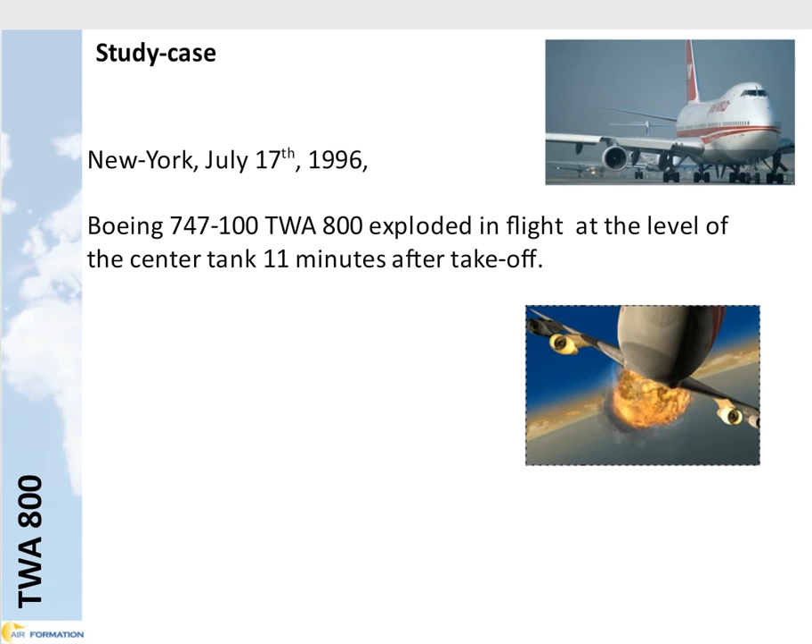The accident occurred on July 17th, 1996 in New York. A Boeing 747-100 from TWA, engaged in a scheduled New York-Paris flight, exploded 11 minutes after takeoff and crashed into the Atlantic Ocean. In this accident, 230 passengers were killed and there were no survivors.

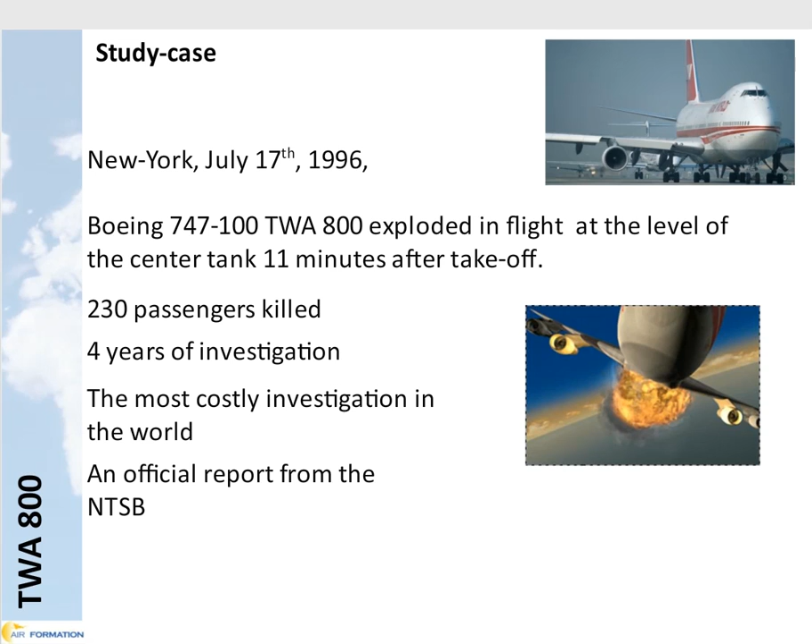The resulting investigation was directed by the NTSB, the American National Transportation Safety Board, and lasted 4 years. It is still considered to be the most costly investigation in the world, as investigators had to recover every single part of the aircraft so as to reassemble it and identify the reasons for its explosion.

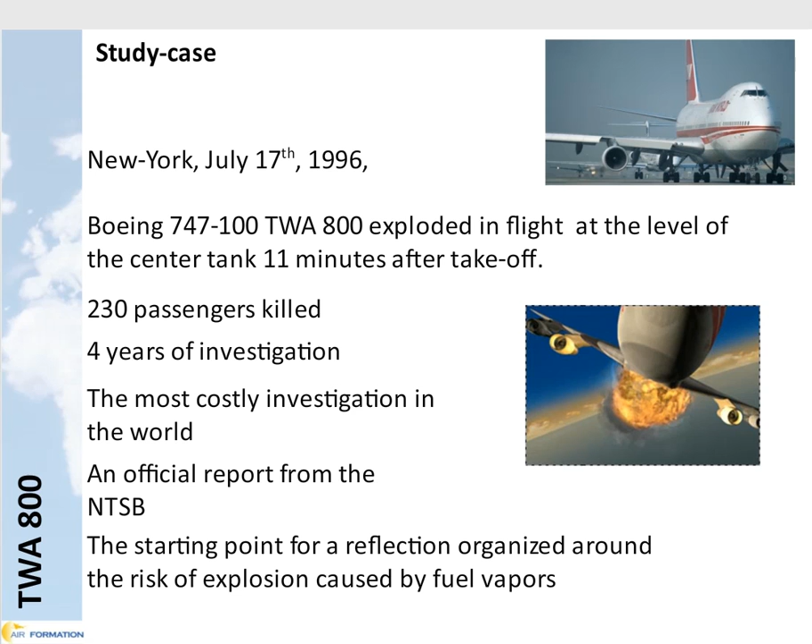In 2000, the NTSB published an official report which closed the investigation. This report can be regarded as the starting point for the CDCCL approach, as it started a reflection upon the risk of explosion in aircraft caused by fuel vapors.

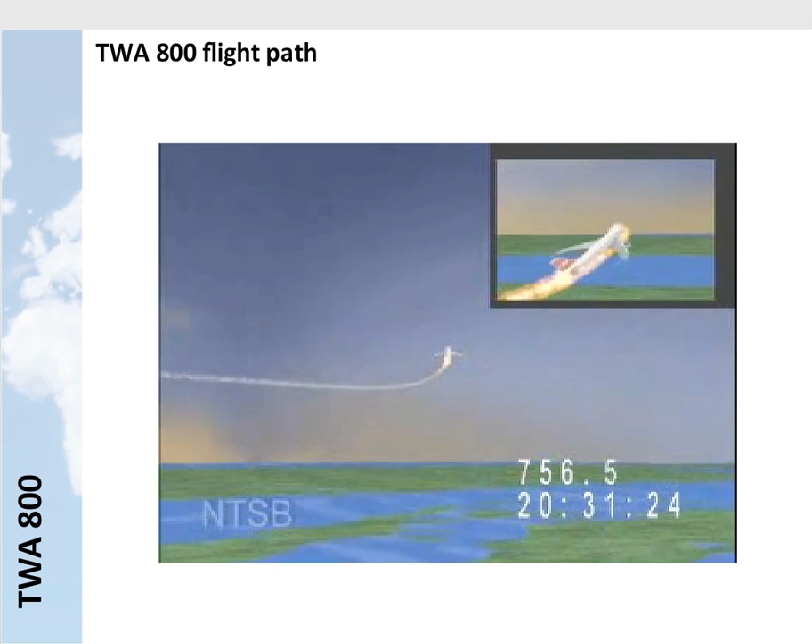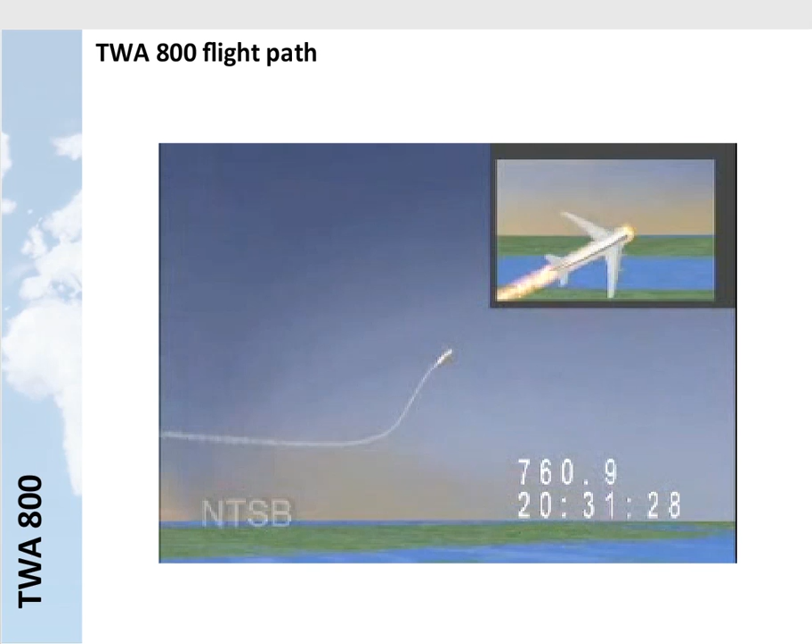With this NTSB animation, you can visualize TWA 800's flight path. This animation was made using flight recorder data. You can notice that around 20:31, 11 minutes after takeoff, an explosion occurred at the level of the center fuel tank. 4 seconds later, the forward section of the aircraft broke off because of the vibrations and the damage to the airframe. The fuselage section of the aircraft proceeded on its flight path prior to falling into the sea. Bear in mind that the aircraft was near the American coast of Long Island.

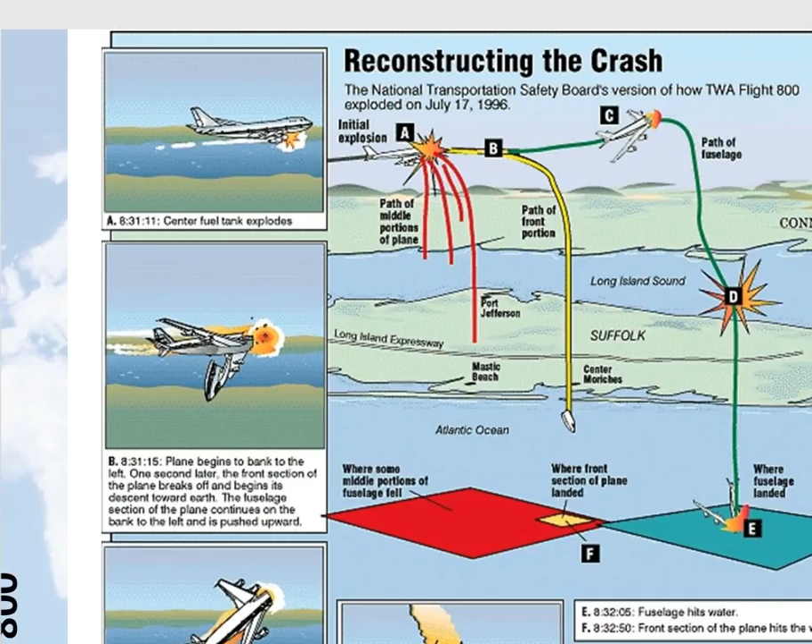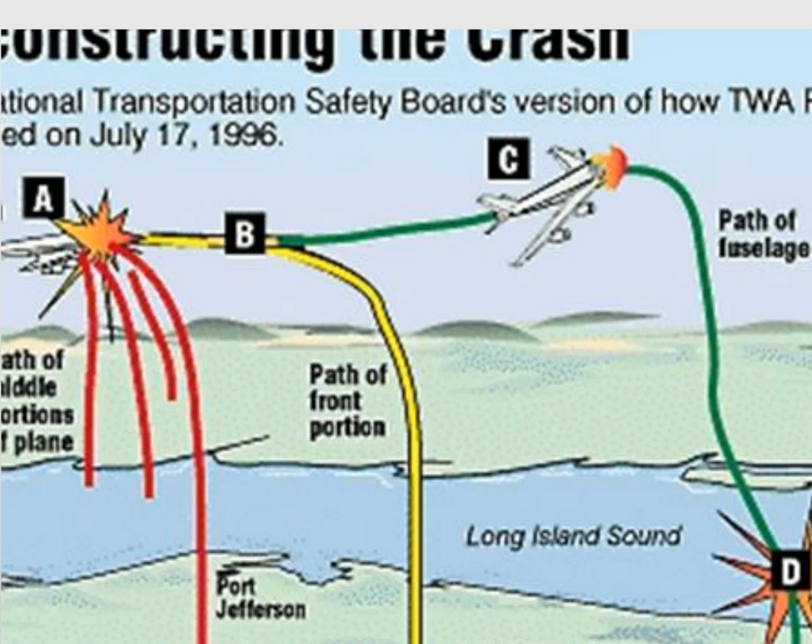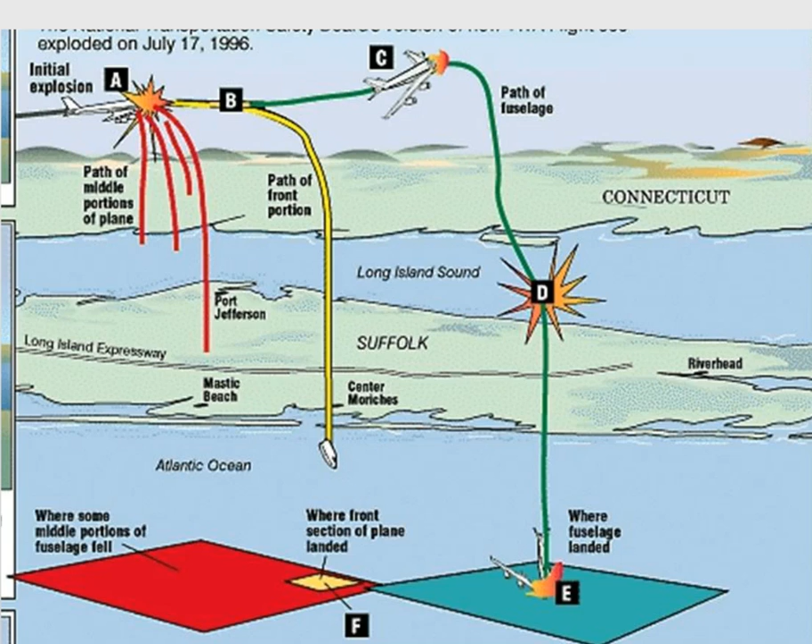In this set of drawings, you can see the crash sequence. At point A, explosion of the center fuel tank and debris falling into the red zone. At point B, the forward section of the aircraft breaking off and falling into the yellow zone. At point C, the highest path of the fuselage section prior to falling down. At point D, the left-hand wing breaking off from the fuselage to finally impact the sea at point E. Points C, D and E, debris falling into the green zone.

At the time of the explosion, the aircraft was flying at approximately 15,000 feet, that is to say about 5,000 meters, and at a rough distance of 13 kilometers from the coast.

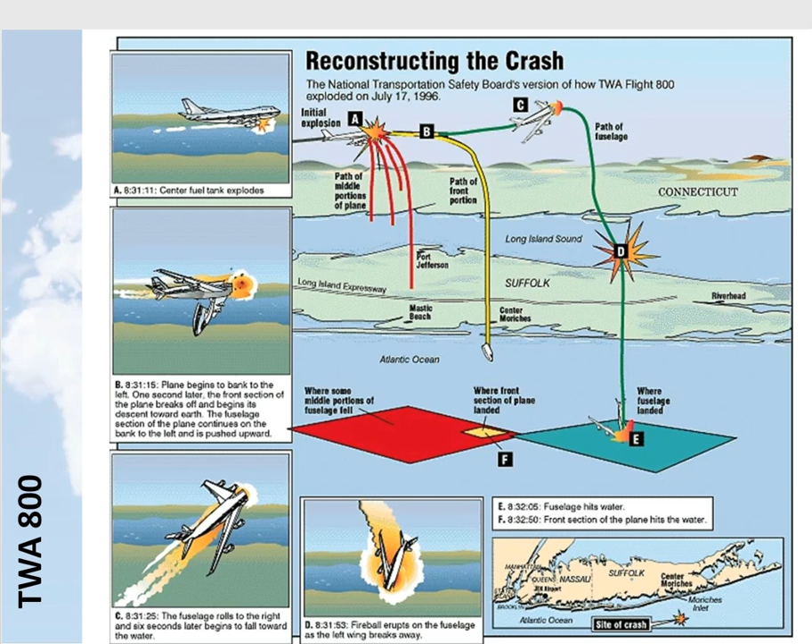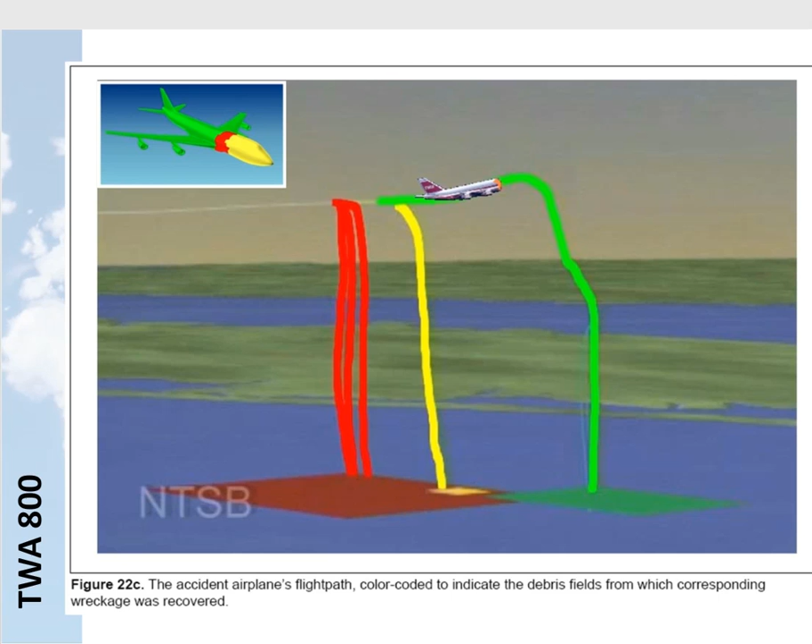After the crash, investigators were provided with a great number of witness statements: pilots from other aircraft, in addition to air controllers, and witnesses from the ground and at sea. You will also notice the presence of the American Navy in the area, which is required in all operations conducted at sea.

Here are the different zones identified. Investigators did their best to understand what had happened and the reasons for the crash.

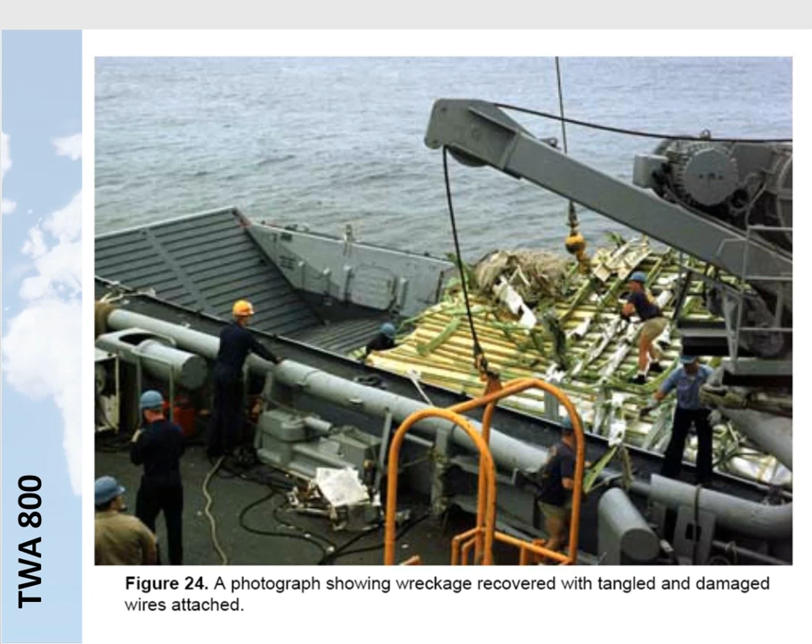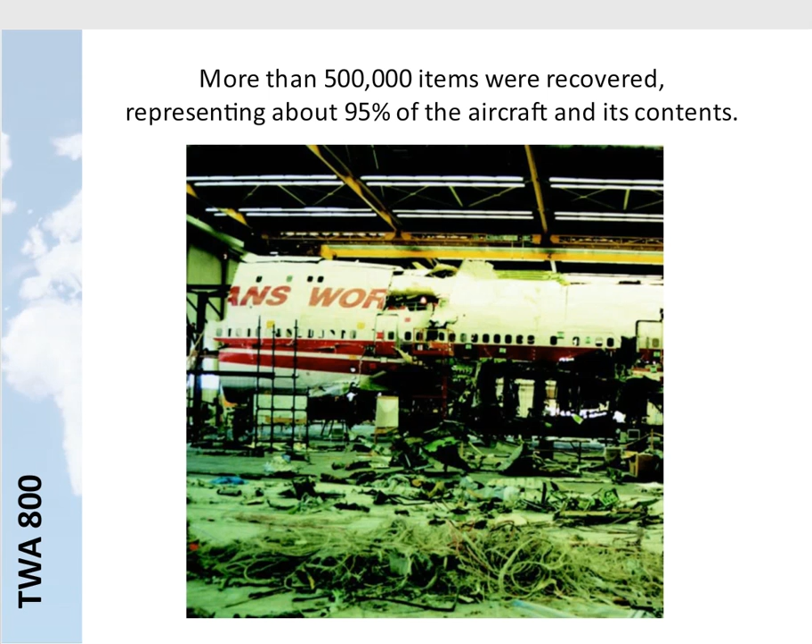The different parts and debris of the aircraft were recovered by investigators in different sea zones. All in all, the elements which were recovered corresponded to 95% of the aircraft and its contents. All of them were reassembled inside a hangar in Long Island. The objective was to understand what had really happened.

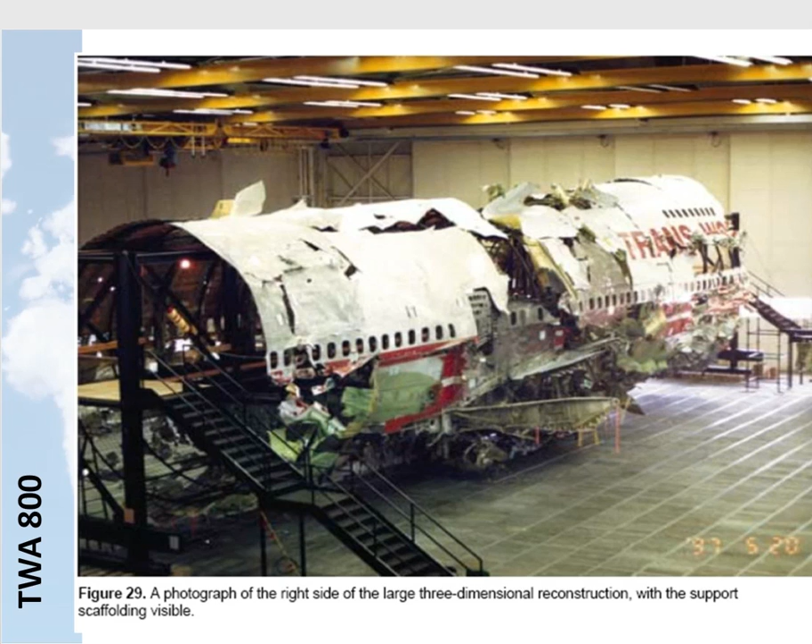At the end of a 4-year investigation, investigators managed to identify the reasons for this crash, thus rejecting the hypothesis of an act of terrorism. Bear in mind that the reconstruction of this aircraft is still currently used to train junior NTSB investigators.